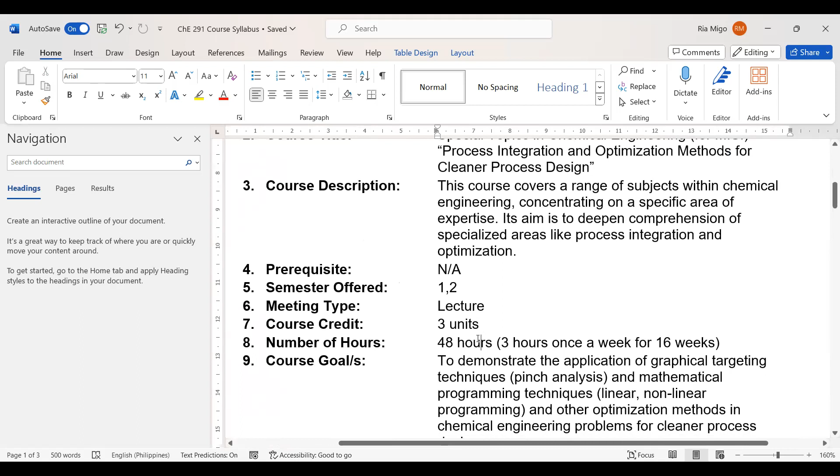All right, so we will meet once a week for 16 weeks. And our goal is to demonstrate the application of graphical targeting techniques. If you will remember in your CHE 32, do you remember yung pinch analysis? It's actually, I think, the last topic.

Do you remember it? Hindi po, ma'am. Okay lang. Okay, nag-pandemic na po ata. Okay lang, so we'll review naman the concept of pinch analysis.

And then mathematical programming techniques, wherein we will try to do linear and nonlinear programming. Kung aabot pa do sa nonlinear, but at least we should be able to finish yung linear programming techniques and also other optimization methods in chemical engineering problems for cleaner process design.

So the reason why we are doing or discussing this special topic is so nasabi ko na itong mga application, itong mga tools na pinch analysis and mathematical programming—we want to address and resolve chemical engineering problems effectively and sustainably. And we will focus on integrating whole processes for resource conservation, pollution reduction, and overall cleaner process design.

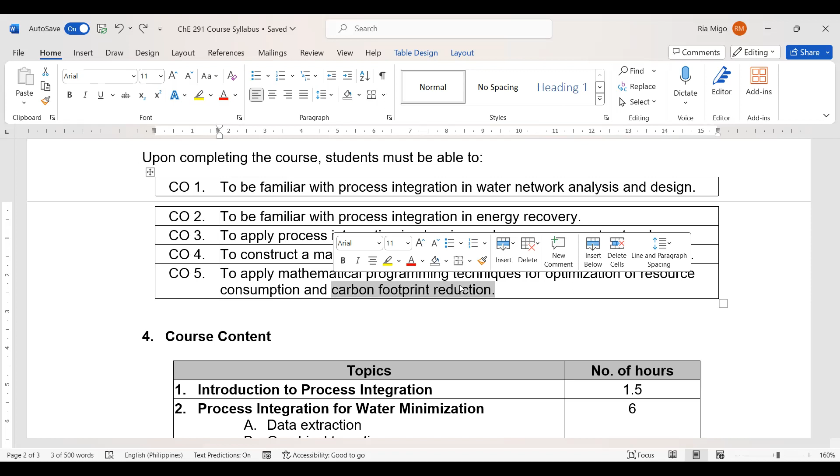Although we can also, since we will do multi-objective optimization, we can also do other resources, but not using pinch analysis, so using mathematical programming. So by the way, I talked already to your advisor, si Sir Butch, and he agreed naman that your final project can be related to your thesis. Ayun, so yun pa lang yung agreement namin.

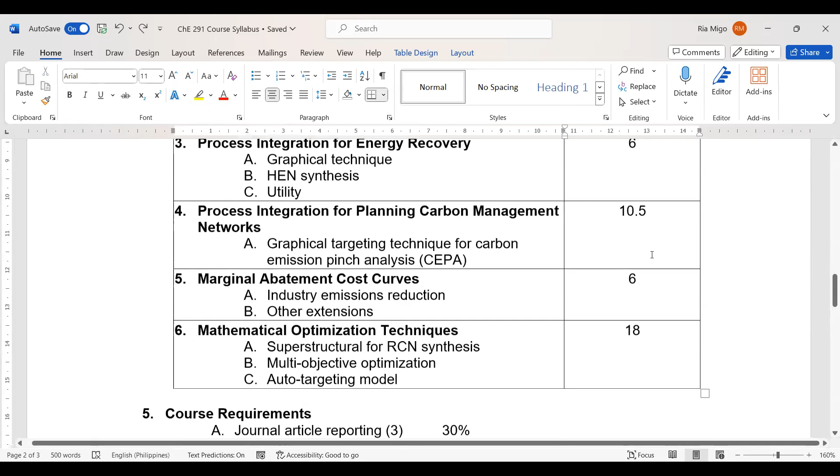For the course content, so we will do an introduction, although yung number of hours may not be accurate, can be less or more depending on our pace. And then next is process integration for water minimization, then for energy recovery, and then for carbon management network. So for these three, our main tool is the pinch analysis, and also its extensions.

So the other extensions would be the algebraic and automated targeting. So don't worry if the terminologies seem to be parang alien right now. Okay lang yon, don't worry about it.

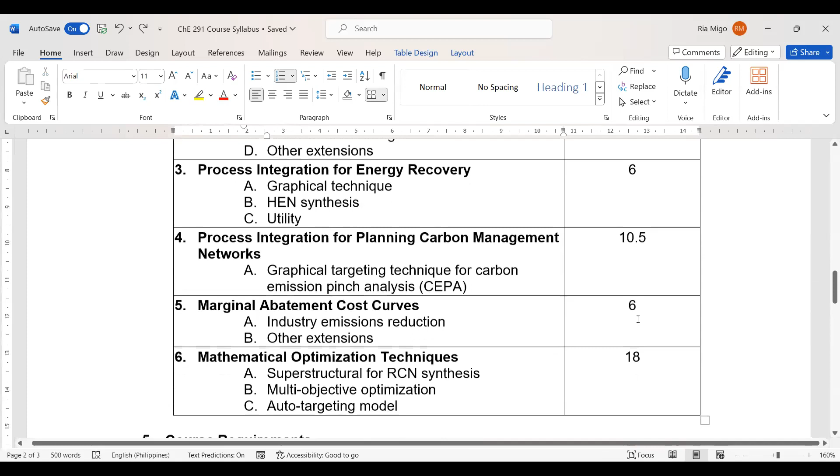We will discuss it, and then we will discuss use of marginal abatement cost curve, so it's another tool that can be used for emissions reduction and other optimization techniques. Okay? So our focus would be this last three topics.

Kaya we would spend more time on this last three because these are my area of expertise, which I learned during my PhD. Okay, for course requirements, we don't have any exams. Rather, your requirement would be journal article reporting. So ano yun?

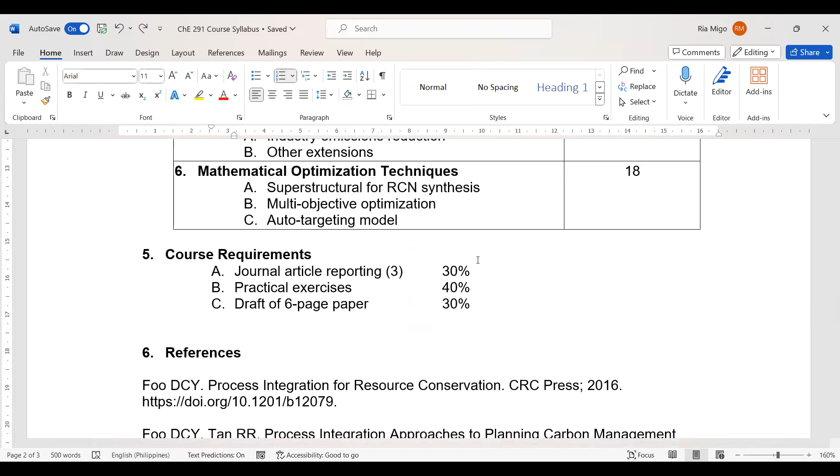We will select a topic from here. Okay, hindi pa ako naka-decide, but from the topic, you will find a journal article and then you will report what the journal article is about. Ayun. And then that would be three journal articles throughout the sem.

We will have practical exercises. So for this one, after we do a hands-on exercise, maybe I can give it as an assignment. So you will use the tool by yourself to find the answer, parang ganun. So these are practical exercises.

Next is ito yung sinasabi ko na draft of a six-page conference paper. So, for your final project, itong draft of six-page paper, ang gagamitin mong tool is mathematical optimization. So, hindi na yung pinch analysis. Although, for your reporting, it may come from these first few topics.

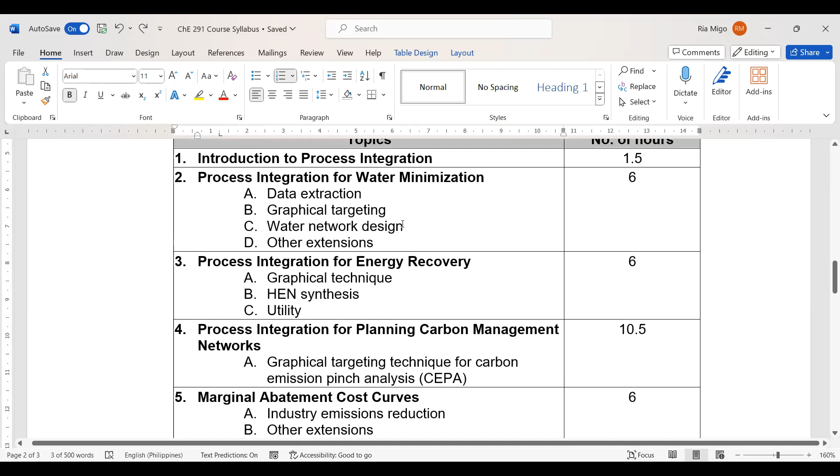Okay. So, may questions ka so far? Ano po? May questions ka? Wala naman po, ma'am.

Okay na, sige. So, for the references, ito pa lang naman yung nilagay ko. Kung gusto mo ng copy, pwede kitang bigyan ng copy. So, anyway, I will send this course syllabus to you after our meeting so you can inspect it. Tapos, pag may questions ka, pwede mo akong tanungin, okay? So, let's proceed. Okay po. Thank you.

Yan. So, kita mo na ngayon, balik na tayo doon sa PowerPoint. Yes po. Okay. Sige. So, first, what is process systems engineering? It's a broad subject. It's a branch of chemical engineering and it's interdisciplinary.

Different universities have their own definition of process systems engineering. That's why I put here, for example, from the University of California, Davis. Ang definition nila, PSE addresses the broad area of process design, operation, and optimization. While for this person from the University of Twente, the Netherlands, it delivers tools for guided decision making in the development of new processes and products.

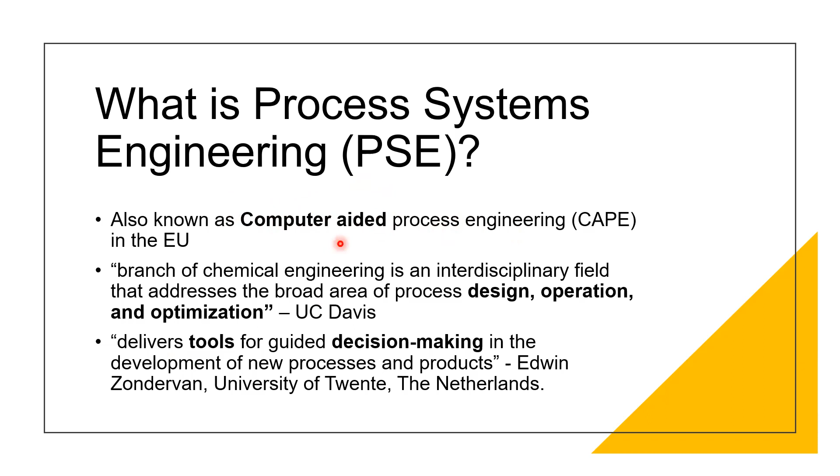So, in my opinion, both are very correct and accurately describe process systems engineering, especially yung creation ng tools, no? And of course, the purpose of these tools is guided decision making. In the European Union, PSE is known as computer-aided process engineering, and there's an emphasis on the computer-aided, because most of the tools that we are using would be through the help of computers. So computing tools.

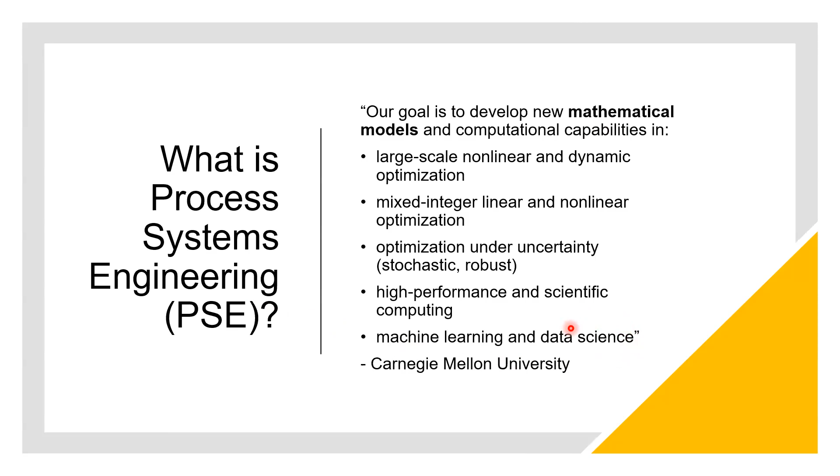So as you can see, it's a very broad subject matter. It can touch different topics like ito nasa screen, and these are application areas. Sobrang broad. It can touch on optimal process synthesis and design, operation control, supply chain, scheduling and planning, enterprise-wide optimization, sustainable processes and circular economies.

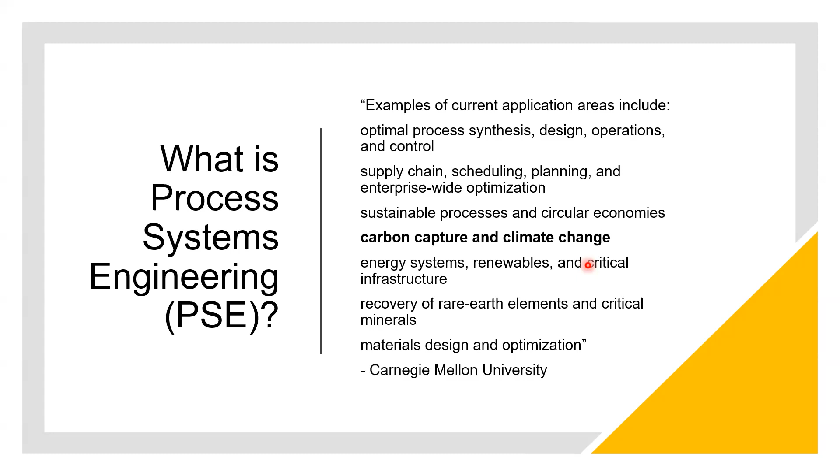Ito naka-bold kasi this is my area of application, carbon capture and climate change, and also energy systems and renewables. It's also part of my dissertation. And critical infrastructure, recovery of rare earth, critical minerals, material design optimization. These are just examples, but there are other applications of the tools that we are creating. It can also be used in the biology field. Madami talaga siya application. That's why we are narrowing down this subject to process integration.

So, process systems engineers are faced with the following problem. Either a large complex model exists, sobrang complicated ng model, hindi siya solvable o hindi siya ma-describe, hindi siya maintindihan. Or a very simplified or shortcut model exists, na sobrang simplification naman, hindi niya accurately na-describe yung problem. Or there's no model at all. So, na-imagine mo na we are going to work with models.

And then, the aim is to have a model that not only describes the phenomenon or process correctly, but has adequate numerical characteristics. So, I'm sure that you are familiar with that kasi yung BS thesis mo is modeling, right? CFD. 'Di ba? So, you created a model that you think accurately describes what's happening in the fluid flow in that microfluidic system.

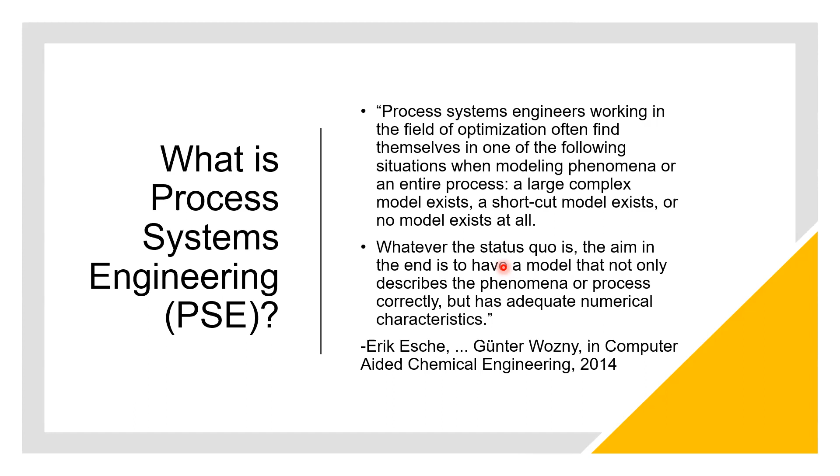Okay, sige. So let's just do a brief history of PSE. There is a very good publication that describes the history of PSE. I will just send this to you. It's not a required reading, but a good one if you want to venture into the topic of PSE.

Okay. So based from that reference, PSE can be divided into four distinct periods. The formative, setting of foundations, computer-driven, and the modern period, which is the 21st century. Okay, so yung first period, yung formative and setting of foundation. Ano yung what happened during that time? Yeah, so during that time, they started yung process analysis, design, and development.

And during that time, nagkaroon na yung text or books on linear and nonlinear programming and the popular algorithm, the simplex algorithm. So, tandaan mo to because our linear programs usually are solved by this very simple but powerful algorithm, which is the simplex algorithm. Okay, so na-skip ko yung, setting of foundations na pala yun.

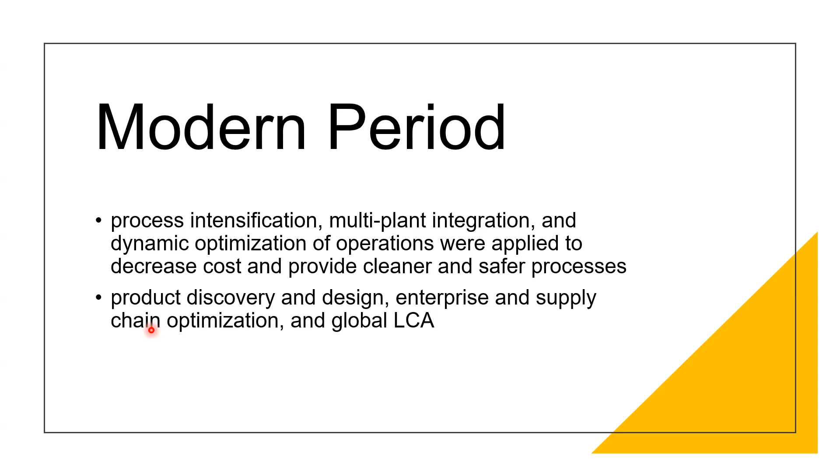Anyway, we will discuss yung supply chain optimization naman. So let's see. Okay, pero if you have spare time, you can start researching already. And global LCA. So kasama yan sa PSE.

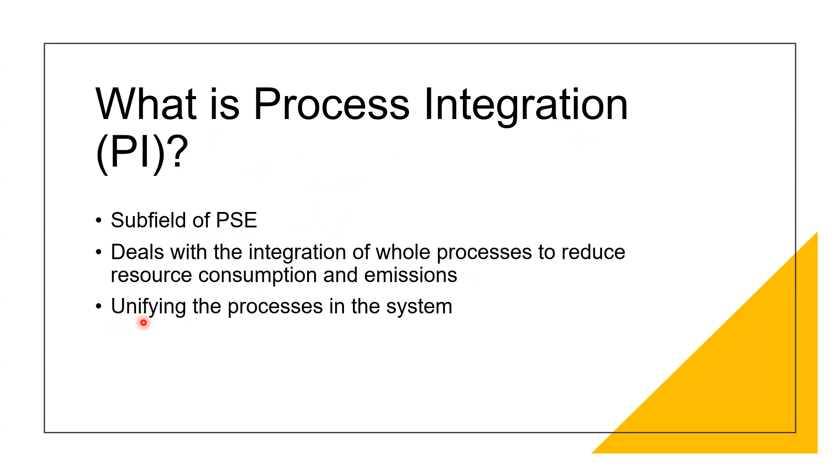Now we move on to process integration. So if PSE is a subfield of ChemEng, PI is a subfield of PSE. So meron pang subfield of a subfield. And ito nga yung sinabi ko, it deals with integration of whole processes to reduce resource consumption and emissions. And the goal is unifying the processes in the system. Ayan. So move naman tayo sa history of PI.

The initial or the beginnings of PI started in the 1970s, and in the concept called the heat integration. So that time kasi, nag-start pa lang yung oil crisis. So there was a need to conserve energy and optimize yung energy production. So it provided foundations for the CHP plants, combined heat and power. So are you familiar with the CHP plant, combined heat and power? Yes. Yeah, okay.

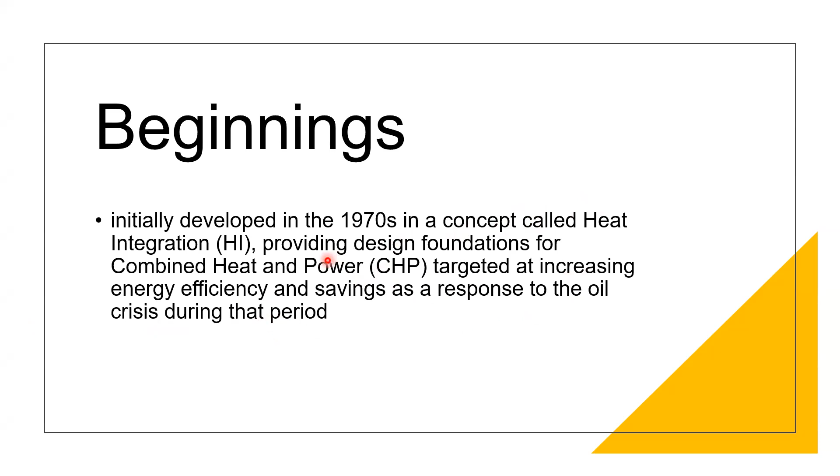So nowadays, yung PI, it's divided into two major schools of thought: the thermodynamic based pinch analysis and the mathematically based mathematical programming. So yun daw, nag-branch daw into two major schools of thought.

Ba't nasingit yun? Anyway, sige.

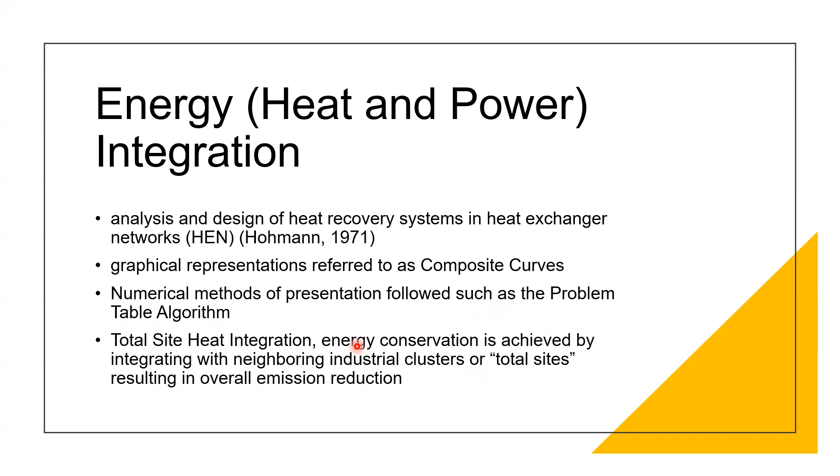So, back to the history. Ayan. So, nagkaroon ng graphical representation known as composite curves. And then, nagkaroon na ng mga problem table algorithm, at saka total site. So, okay lang. You can just read it later when I give you the syllabus. Okay. Check mo dun yung reference on process integration. So, nag-start from energy, no?

And then, they saw that yung tools or yung techniques na ginagamit sa energy integration can be used in mass integration. So, may parang analogy, no, with the heat and mass. That's why they capitalize on the structural similarity of heat and mass transfer. So, they use the same tools but on mass transfer. That's why nagkaroon ng water pinch, at saka, et cetera, other resources.

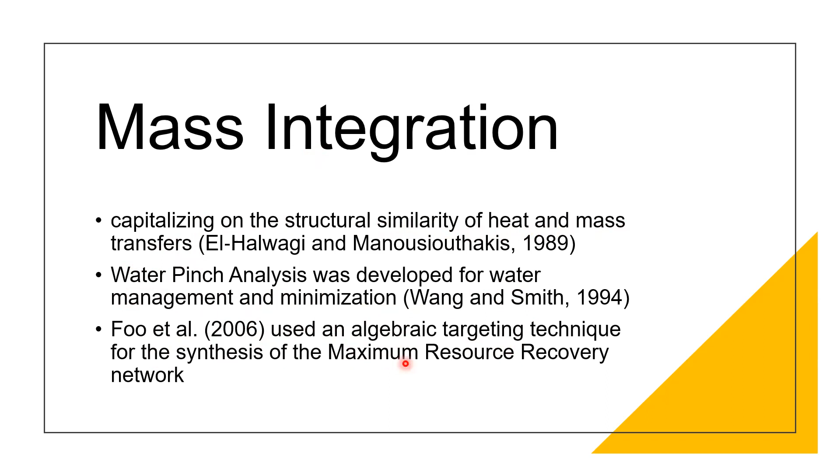And then, mas lalo pang inexploit yung tool. So, may tool ka, pwede din palang gamitin with supply chains and other applications. So, dumami na yung application kasi pwede rin pala siya for supply chain systems, supply chain networks, resource conservation, even yung carbon capture and storage and carbon management networks. So it's the same tool, the same concepts, but applied in different fields or areas of application. So powerful siya. Itong naimbento nung kailan ba yun? 1970s. Yan, 1970s. Okay, sige.

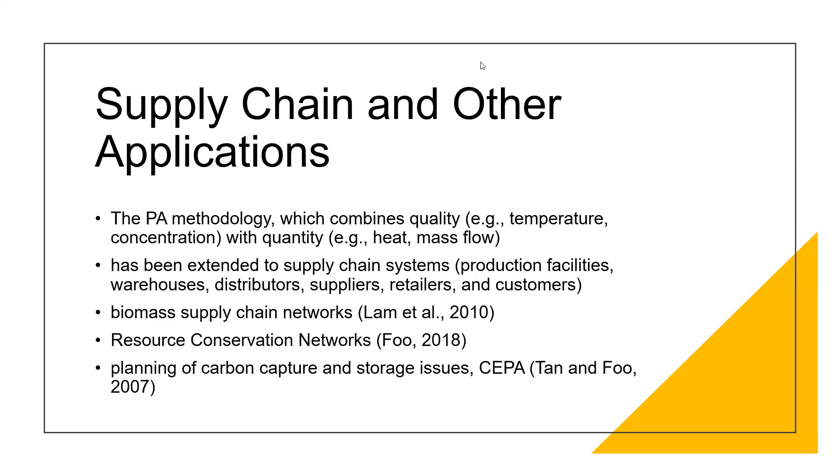So, punta naman tayo sa, oh, wait lang ha. Isa pang introduction na slides. May question ka so far? Wala naman po. Okay. Ayan. So, kita mo na yung slide ko. Wait lang, Crystal. Yes po. Break lang 1 minute. Wait lang. Okay po.

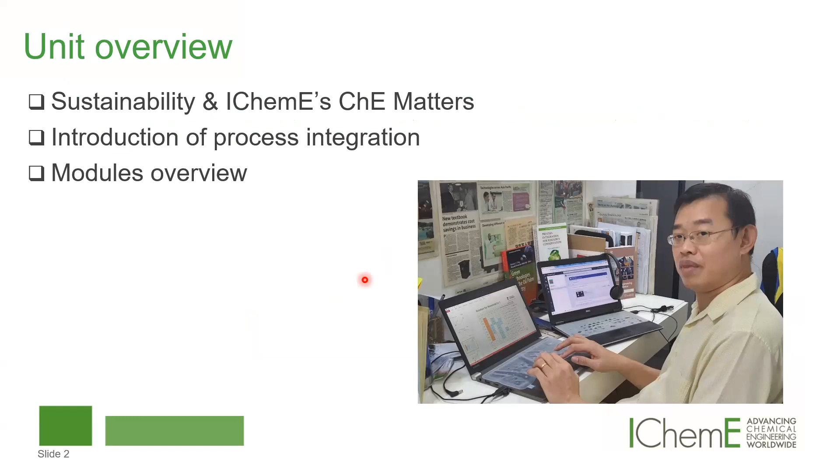Okay, so we're still on the introduction, but now I'm using the slides of one of my mentors, Professor Dominic Foo. I just want to acknowledge him. He shared his slides on process integration. So hopefully you will meet him because he will be visiting UPLB in May and giving a lecture. So baka i-require kita mag-attend sa lecture niya. Okay, so this is Dominic Fu. He's the one who gave me this material that we will be discussing. So he's an expert on this subject matter, process integration.

So we begin with an introduction on sustainability. Not sure if you have encountered the formal definition of sustainability because there are various definitions, and this one is from the EPA. Basically it says that sustainability creates and maintains the conditions under which humans and nature can exist in productive harmony, permitting the social, economic, and other requirements of present and future generations. So not just fulfilling our needs today, but also fulfilling the needs of future generations. So that's sustainability. And the common definition is that it consists of three pillars: environment, social, and economic.

Right? So then for each pillar, there's an overlap, like between environmental, economic, and so on and so forth. So for each pillar, there is a concern. So for example, sa environment, ano ba yung concern? Yung resource use, 'di ba? Pollution prevention. Sa social, of course, yung standard of living, education, community, equal opportunity. Sa economic, in a business standpoint, important na merong profit, cost savings, economic growth, R&D.

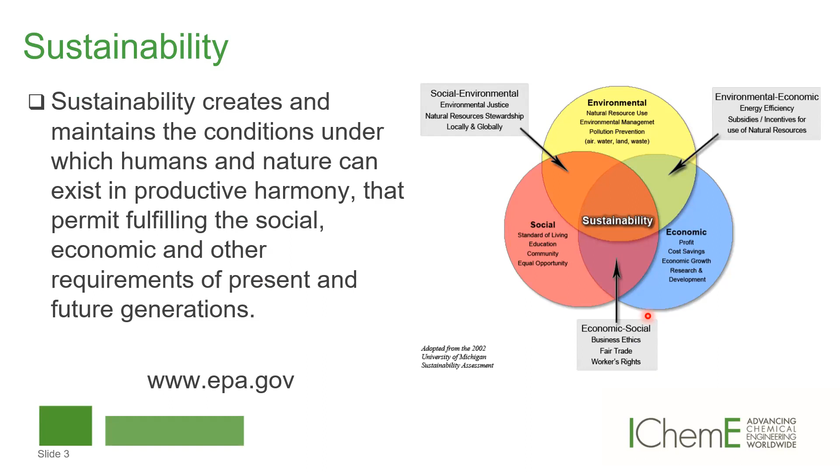And then yung overlap between environmental and economic deals with, for example, energy efficiency, subsidies or incentives for use of natural resources, and then yung overlap between social and environmental, yung environmental justice, stewardship of natural resources, and between social and economic, yung business ethics, fair trade and workers' rights. So, that's the definition of sustainability, and this is the reason why we are discussing this topic on process integration.

But our needs might affect our environment. Okay? So, there should be like a balance between yun nga, yung tatlong pillars ng sustainability, which is the social, economic, and environmental. Okay, so this is an example of how sustainability is being addressed in a company, in a water company. So what?

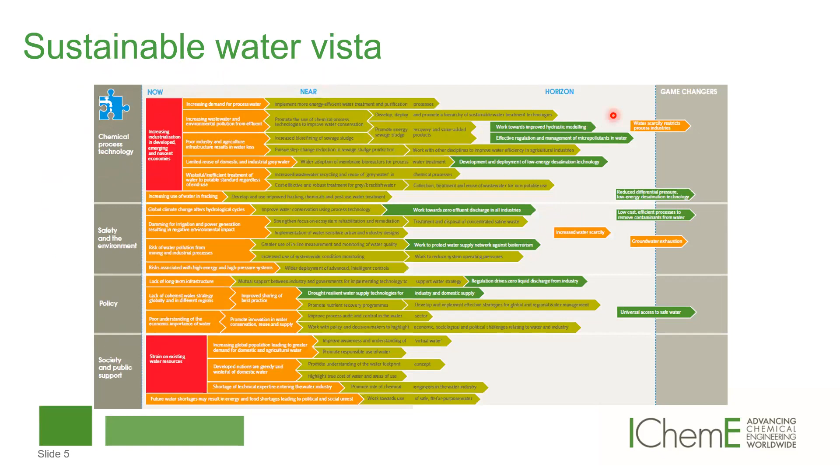So for example, there are various technologies that can be used to address the better use of water. Some example would be the use and recycle of gray water. Okay, so the technology can be implemented now or near or in the future. Okay, so this is just some examples.

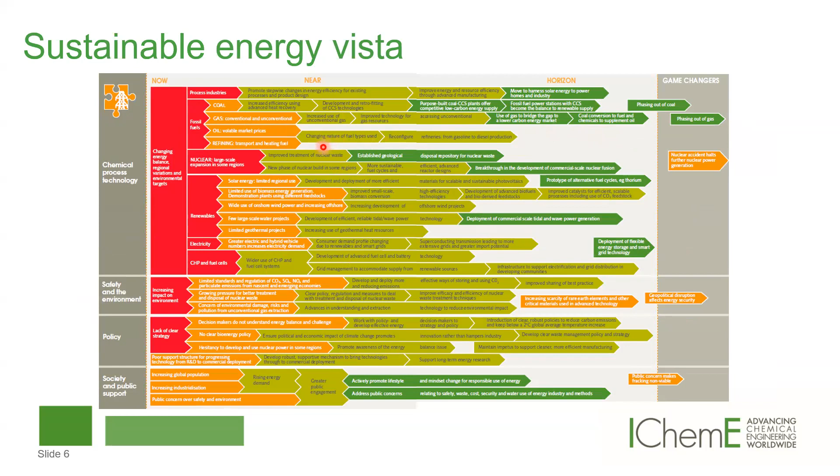And this one is for the energy naman. So there are possible action steps that can be implemented to address the sustainability issues in energy. Okay. So just don't worry, those are just examples. So now we move on to the role of process integration in all of this. Okay.

But again, just a brief history. May separate history kasi si Professor Foo sa slide niya. Pero basically, like what I've mentioned earlier, 1970s nag-start yung process integration, and the focus was on heat and energy. So during that time, they synthesized the heat exchanger networks using the concepts of process integration. It was in 1989 that a mass exchange network appeared. 1994 yung water, hydrogen, and property.

Finally, the energy planning that focuses on carbon footprint planning, ayan, appeared in 2007. And on your right, this is just an illustration of a pinch diagram. So later on, we will discuss this in more detail. Okay, so next slide.

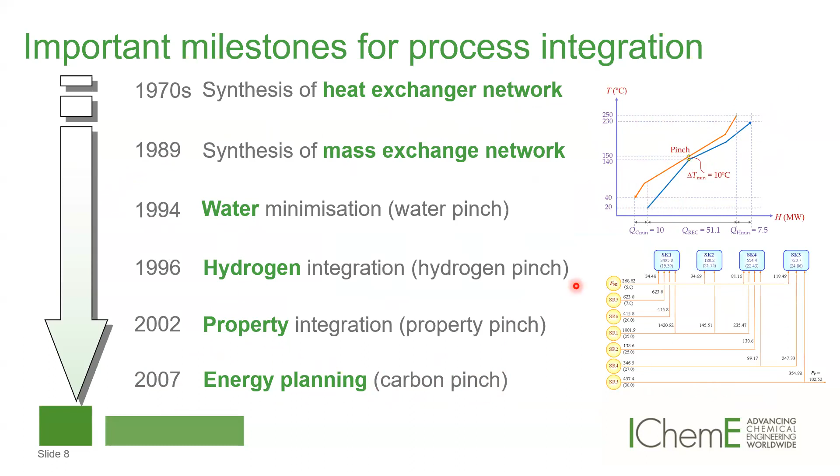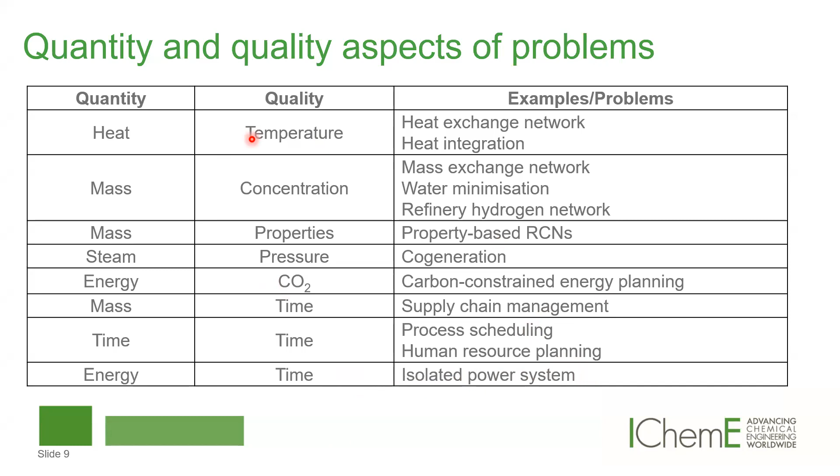Okay. And then there's also for supply chain management, yung quality naman is the time. So the quantity is mass, quality is time. Then pwede rin siya ma-apply sa human resource planning, wherein both quantity and quality are the time, and then energy and time for isolated power system. So these are just some examples of the application of pinch analysis on different problems. Okay?

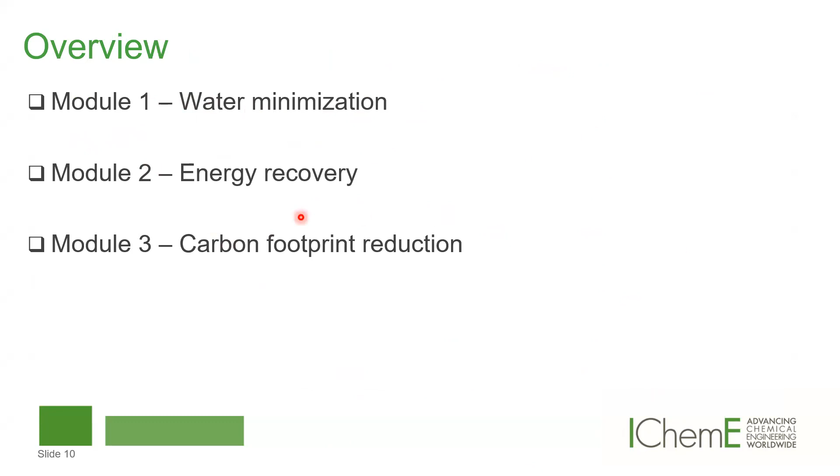And we will discuss all of these modules, water minimization, energy recovery, and carbon footprint reduction. In process integration, there are two main steps, the targeting and the design steps. Okay. And these two steps are present in all process integration problems. Okay. So we extract the data from the process flow diagram, and from there, we use some graphical techniques to set the performance targets. And this is known as targeting.

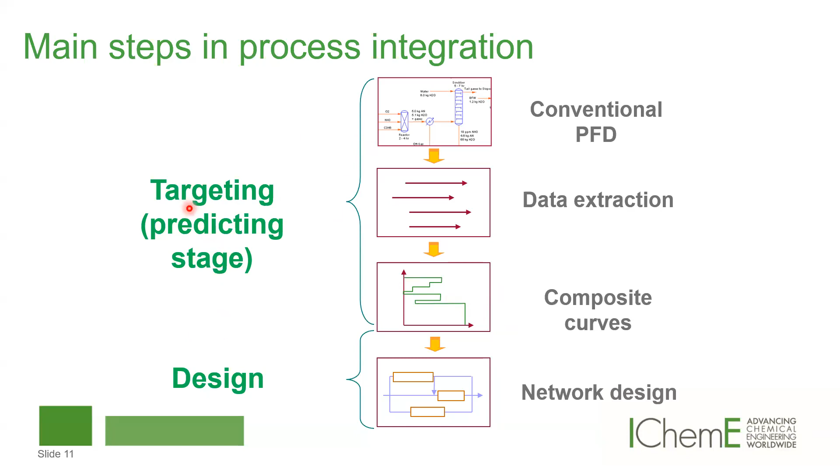Okay. And next, once we establish the target, we now go into the details of the design to meet the targets. And that is the two-step process of process integration, targeting and design. So remember, the main philosophy of process integration is always to set the performance target of the design. So we look at the big picture first, and then the details will come later.

And we always emphasize the performance targeting strategy. So we look at where we can find the low-hanging fruits so that we can set the performance. And then once we know the targets, we then design the system to achieve the targets. Okay. So, may question ka so far?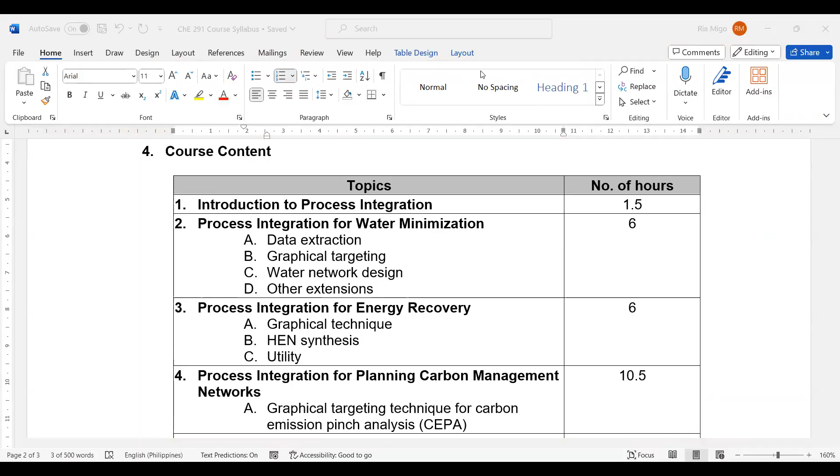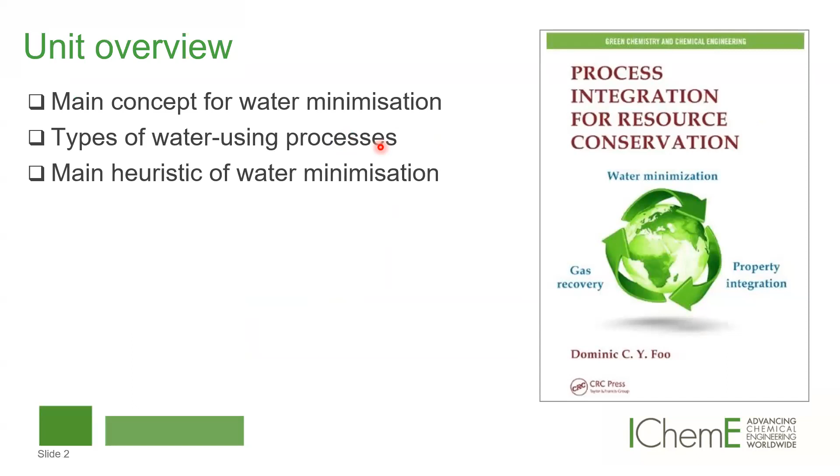So here we will discuss the main concepts of water minimization and also the types of water using processes and the main heuristics. So heuristics just means rules of thumb. Okay, familiar ka ba doon? 'Di ba sa equipment design at saka sa plant design may mga heuristics. Yes po. Okay.

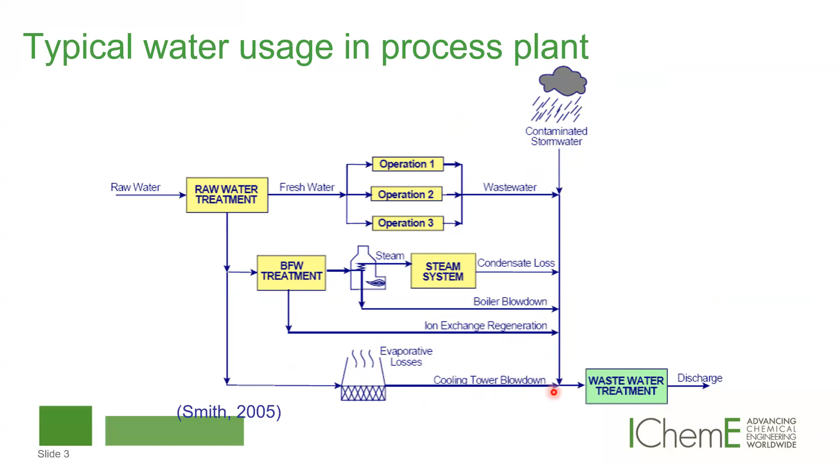Ion exchange regeneration gives us a clue that this treatment would be due to ion exchange. Then for the cooling tower, there's a possible loss due to cooling tower blowdown. Since our plant may be exposed to the environment, there is contaminated stormwater, and all of these streams go to our wastewater treatment.

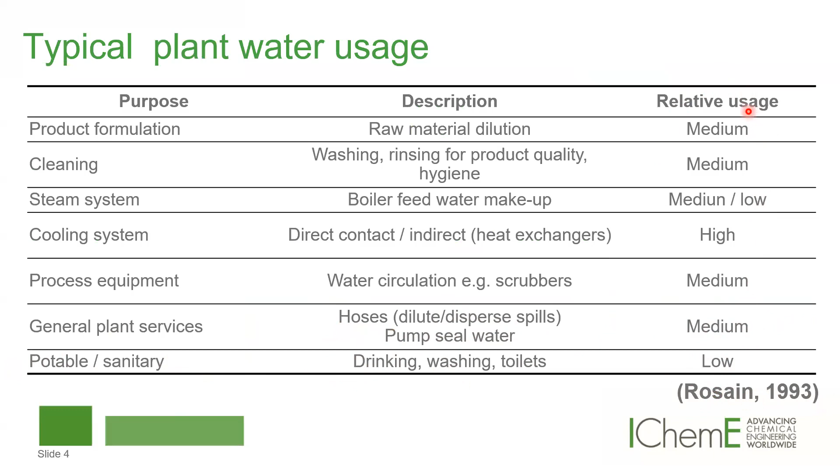So you can see that based from this reference, for a typical plant, this is the usage.

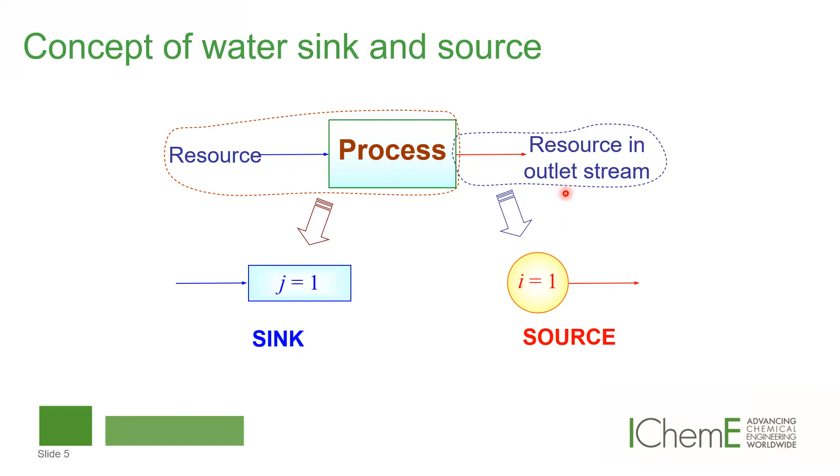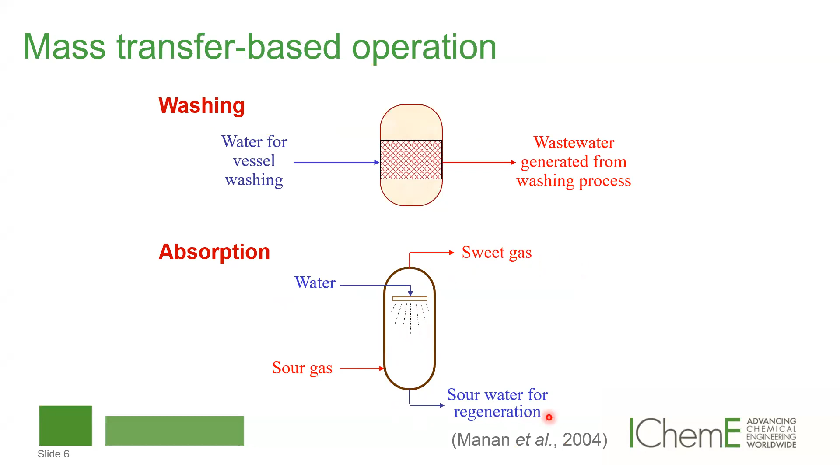Another mass transfer based operation is absorption. For example, we have a sour gas—what do we mean by sour gas? It has H2S. In the absorber or scrubber, we can use water to remove the H2S and CO2 from our sour gas. The top product would be sweet gas, and the bottom product would be sour water for regeneration. On the other hand, non-mass transfer processes can be the utility makeup or blowdown.

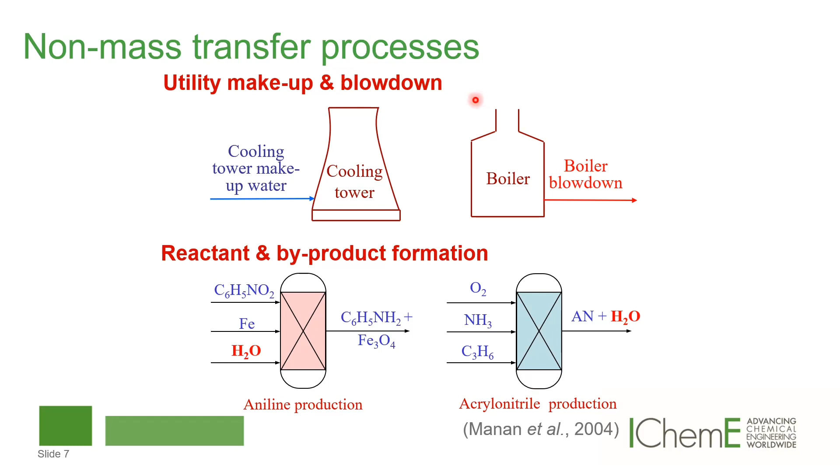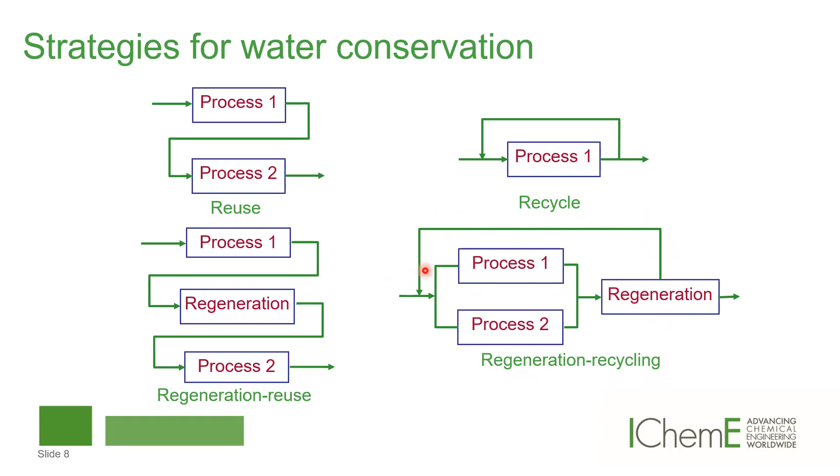So this is an example on acrylonitrile production. Our goal here is to identify the water sources and the water sinks.

But first, let's look at the process of acrylonitrile or AN production. It's produced by reacting propylene, by oxidizing propylene in the presence of ammonia, and that passes to the reactor. So from the reactor, for almost every kilogram of AN, there's the same amount of water being produced. So if we want to produce more product, that means more water will be produced.

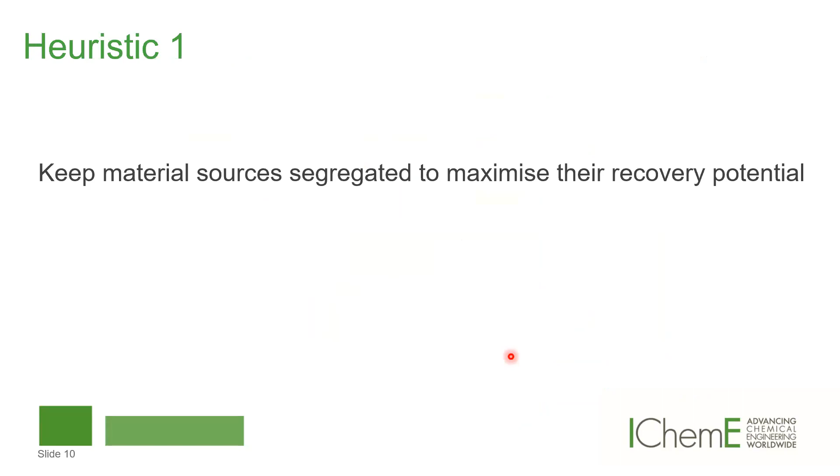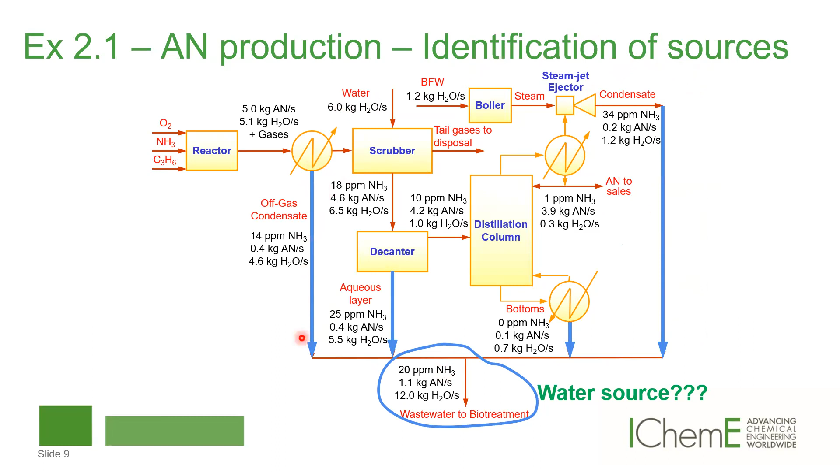Now, the next part: earlier in the previous slide, we identified the sources. So these are the four sources, because they have the output of water. Next, we identified the sinks.

So now we identify the sink. What's our clue for the sink? These are the processes that need water. So what are the sinks? As I mentioned earlier, the scrubber and the boiler.

So these two sinks are the possible processes where we can send our recycled water. For example, the scrubber needs 6 kilograms of H2O per second, while the boiler needs 1.2 kilograms per second.

So for example, in that plant, there are technical constraints. Our equipment have technical considerations. For example, in the scrubber, what's the flow rate? It's 6 kilogram, but our scrubber can operate between 5.8 and 6.2 based on the specification. And then, to wash the feed, the ammonia content should be less than 10 ppm. So that's the requirement of the scrubber.

Okay, so these are the sinks. The boiler feed water has a stricter requirement, which is 0 ppm. So there should be no ammonia in the boiler. There is a heuristic or best practice that we want to reduce the water in the sink, so instead of choosing the upper boundary, we choose the lower boundary of 5.8 to perform the maximum recovery of water. In other words, we want all water units to consume the minimum amount of water.

When we try to operate the scrubber at a higher flow rate, for example higher than 6.2, the result might be flooding. So in terms of flow rate, for the sinks, there's a best practice that we should operate using the minimum flow rate. On the other hand, in terms of the ammonia content, we should go with the maximum ammonia content. So it allows us to maximize the recovery of water. That's another heuristic for the design.

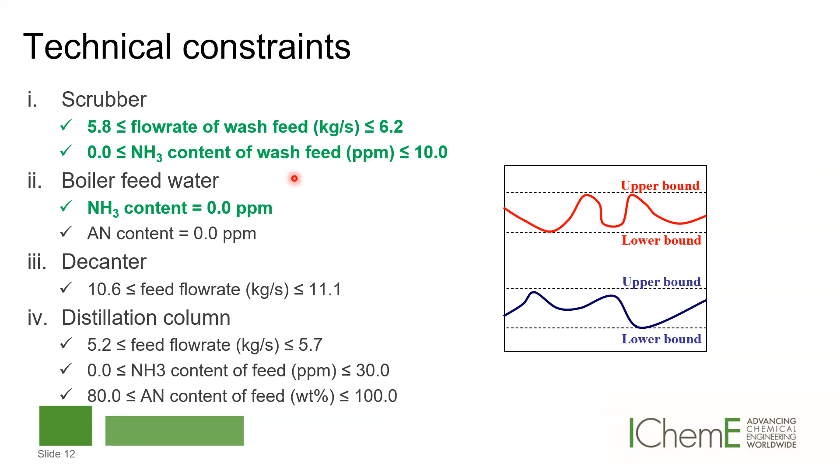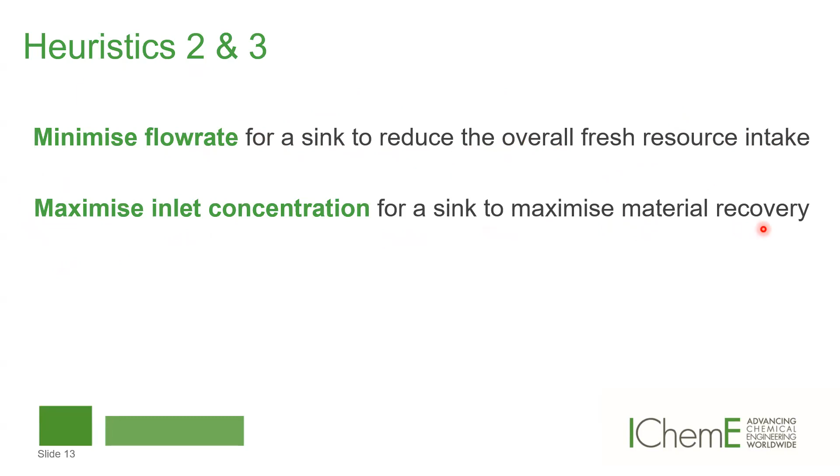So heuristic number two: minimize flow rate for a sink to reduce the overall freshwater intake, that's the reason. And heuristic 3: maximize the inlet concentration for a sink to maximize the material recovery.

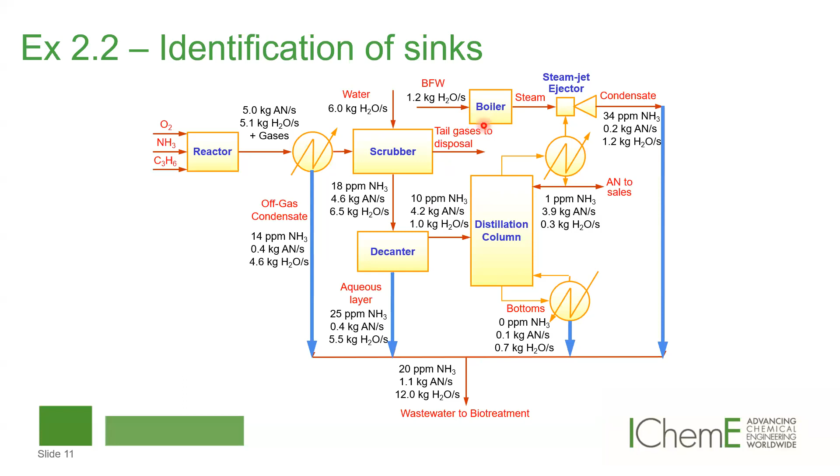So again, for the boiler feed water, the required specification given to us by the plant is 0. So we have no choice there, it must be fresh water. However, for the scrubber, we're given the specification that it operates between 5.8 and 6.2. Again, by heuristic, we choose the lower flow rate and the higher concentration - that's for the sinks. Then we identify the sources. We write down from the process flow data the flow rate and the concentration - these are just the data from the process flow diagram. So that's the first part, the data extraction.

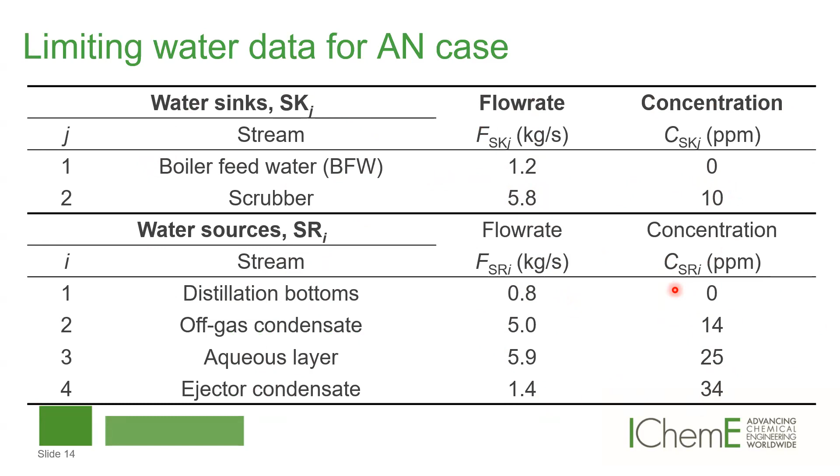So now I will ask you two questions: identify the water sinks of this process, and identify the sources. Okay, let me give you time.

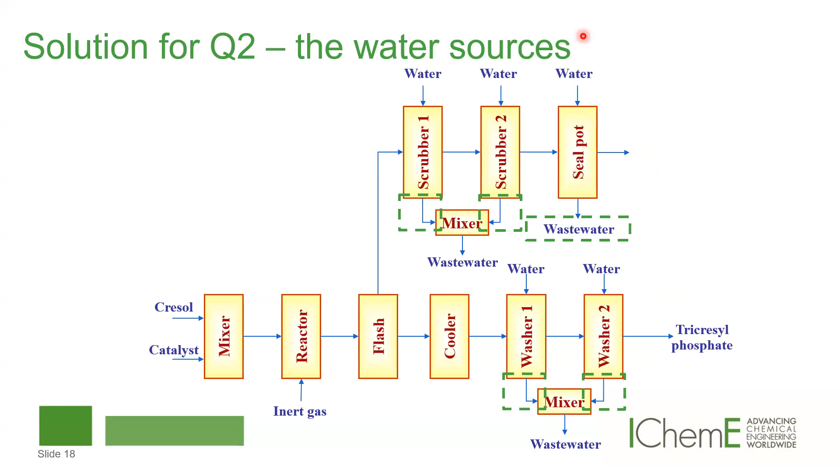Actually, that ends um, our discussion for today. Ayun. So far, may question ka ba? Mabilis pala dapat mag-prepare ako Wala. mm, ng mas mahaba. Akala ko kasi mag-o-occupy ng buong 3 hours. Pero okay na rin na mga 2 hours or two and a half kahit di natin matapos yung buong 3